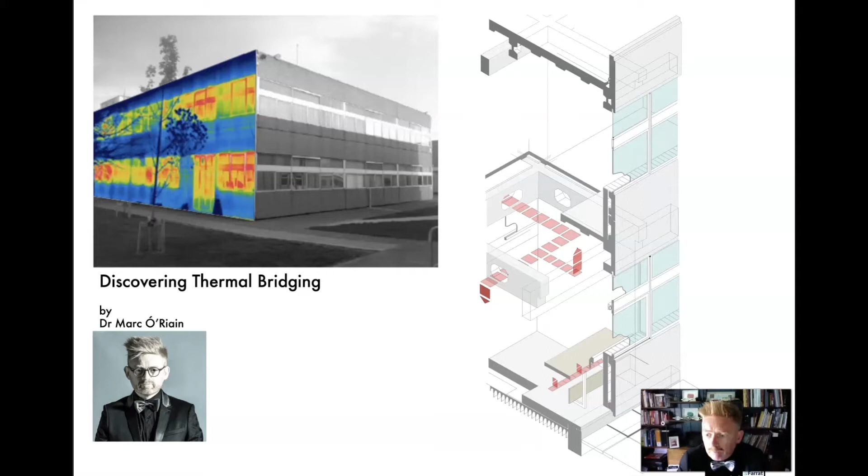Thermal bridging is first referenced in historical literature in a post-war engineering report from the Department of Housing in Denmark in 1956. In a study into moisture transfer in building envelopes, Escold and Korsgaard, who would later go on to design the first zero-energy building in Copenhagen in 1974, found that thermal bridging was happening on the inside of connections between concrete facades and inner floors. They had identified the risk of condensation, particularly with continuous concrete intermediate floor slabs. They also identified that modern, tighter concrete constructions were aggravating the risk of condensation at cold bridges.

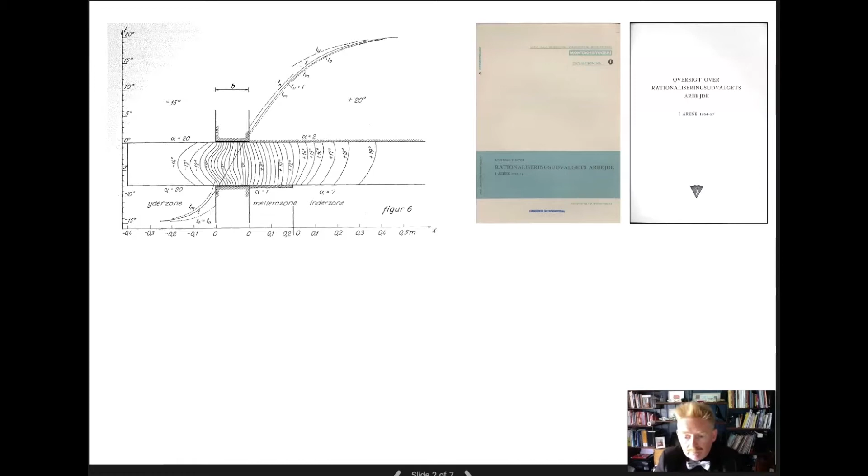The report indicates that there was a working knowledge of cold bridging as part of the Scandinavian construction industry prior to the 1950s. Yet, it was probably the language that became a barrier to the broader dissemination of this knowledge around Europe. Prior to the Second World War, human health was a concern of the modernists in particular. We know that Walter Gropius and Maxwell Fry had been arguing that clean modernist buildings improve the living conditions of the people in their Impington project in 1936 in the UK. Pierre Winter, an engineer and neighbour of Corbusier's in Paris, gave a lecture at CIAM 5 in 1937, arguing for a close collaboration between doctors and architects to reduce diseases to a strict minimum. So it was an issue at the time.

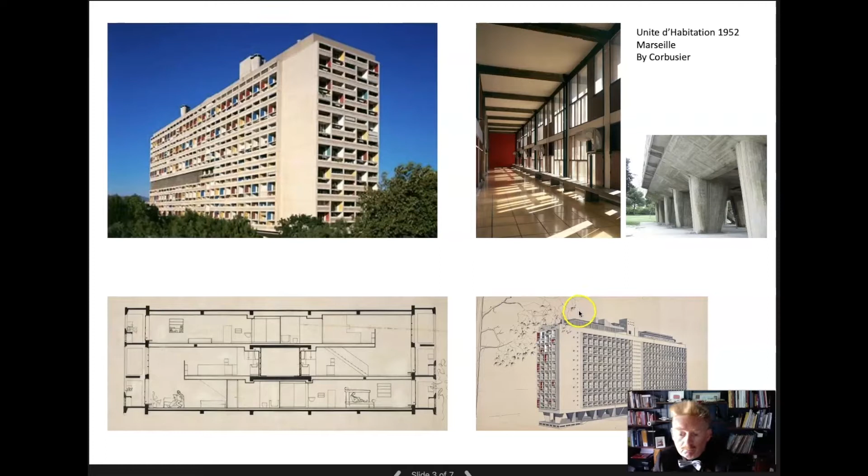We also know that Corbusier had understood the importance of aspect and sun path before designing and completing Unité d'Habitation in Marseille in 1952. Many of the young architects in London County Council in 1950 would be heavily influenced by Corbusier's béton brut of Unité d'Habitation. In 1953, the LCC architects completed Winchfield House, which was heavily influenced by Corbusier and Unité d'Habitation. In fact, it was James Stirling, who worked with LCC at the time, who attributed the concept of Winchfield House to Corb's much earlier and conceptual City in the Park. Such building designs would not benefit from the understanding of thermal bridging.

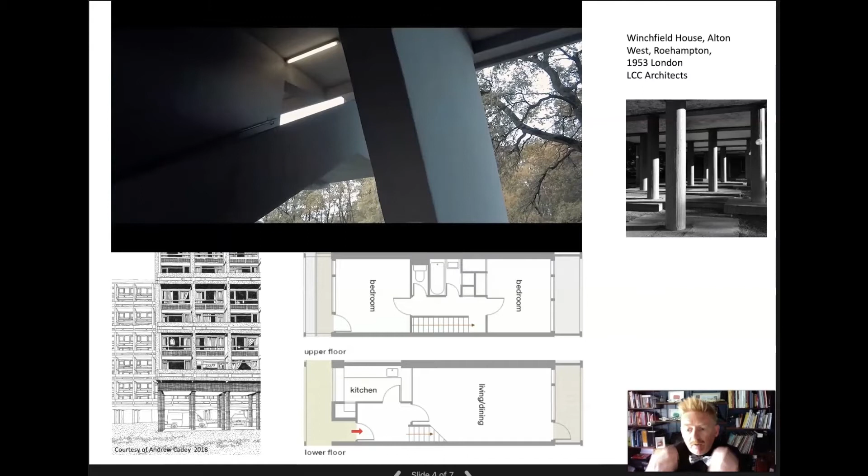In fact, it was Marmot in 1978 who argued that Corbusier carried through on a much higher quality in Unité d'Habitation than LCC did in Winchfield House, where they compromised on so many of the key features of Unité d'Habitation, which would have benefited the occupiers. Unlike Marseille, London would have a higher risk of condensation with much lower winter temperatures, little in the way of insulation in the buildings.

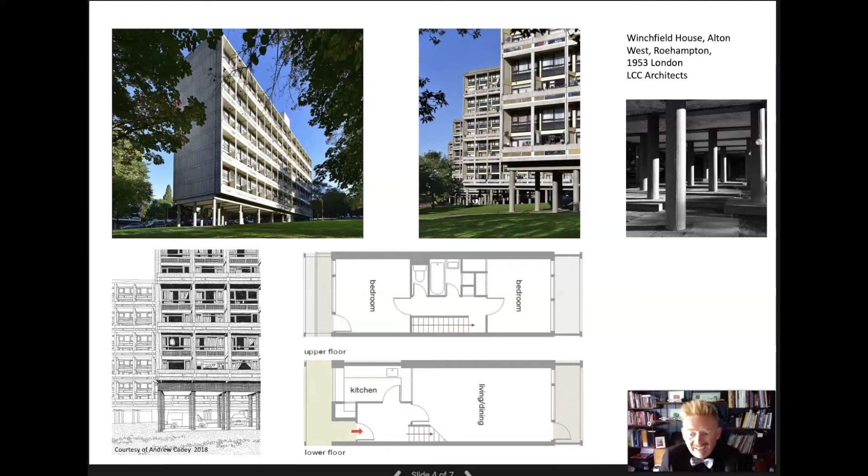So as we moved through the 1950s and 1960s, would British architects, who were continuing to provide mass housing, learn from these experiences and gain better understanding of the environmental consequences? As early as 1963, Brown and Wilson, writing in English in the Canadian Building Digest, warned that linear thermal bridges could cause condensation and structural damage, particularly in freeze-thaw conditions, which could be readily overcome with insulation placed over the entire exterior of the building. What a radical idea. They highlighted the impact of lateral heat movement in non-continuous constructions such as timber frame, which were popular in Canada and the US at the time.

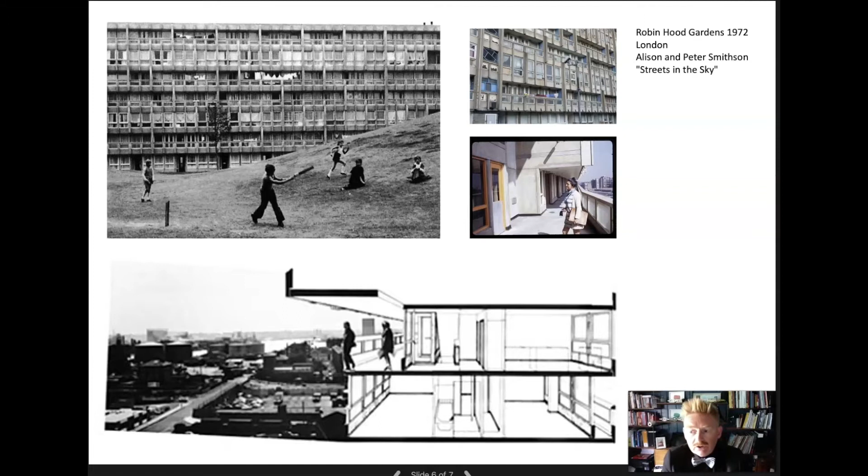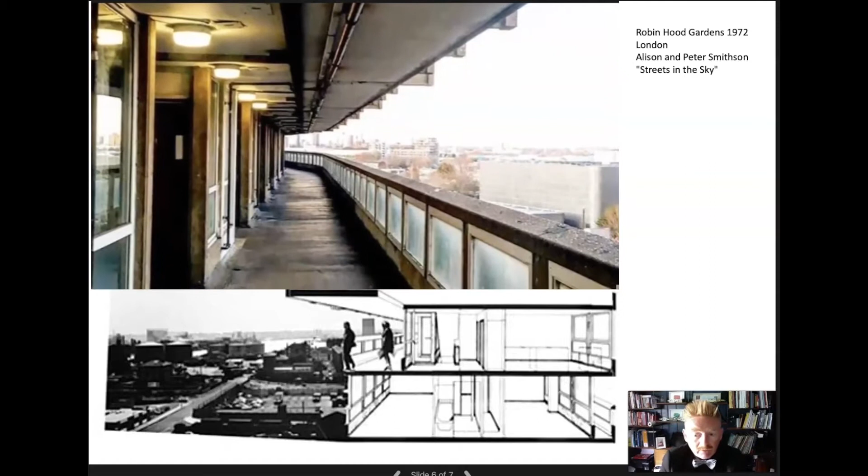So as the consequences of thermal bridging become more mainstream in the 1960s, would architects and developers of housing and apartments change the way they designed and built them? Despite the many social and environmental performance failures of the LCC apartment tower buildings through the 1950s and 1960s, still Alison and Peter Smithson would complete another homage to Corbusier nearly 20 years after Winchfield House, in 1972 at Robin Hood Gardens. The Smithsons, who we know were environmentally aware, and I would argue that perhaps there was an excuse in the 1950s for a lack of knowledge of linear thermal bridging, but was there an excuse in 1972?

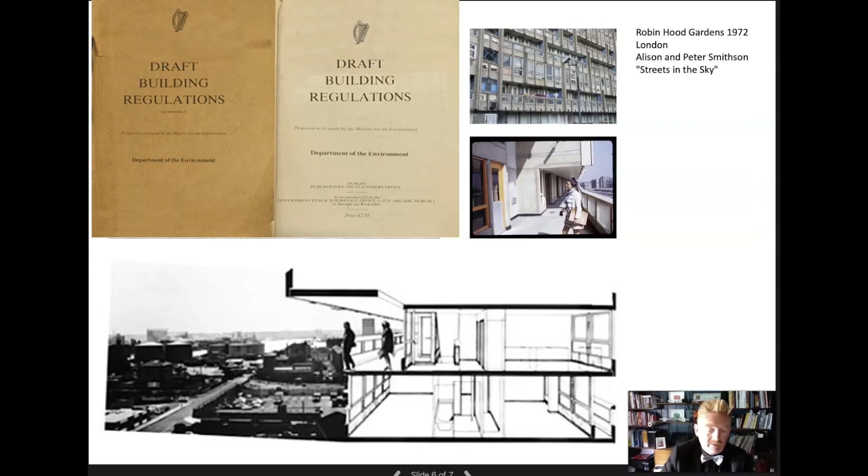Realistically, without insulation and with the use of single glazing, thermal bridging must have seemed of little concern in terms of energy loss. In fact, it would be the oil crises of 1973 and 1979 which would bring governments, policy standards, developers, architects, building owners and occupiers to a concern for building energy conservation, and it would only be then that issues like thermal bridging would start to get a fair hearing. Although they are all linked, Chernobyl, the Kyoto Protocol, it would be the Energy Performance of Buildings Directive in 2002 that drew our focus into building energy, and we became more concerned about insulation and thereafter thermal bridges in relation to heat loss.

So thank you very much for your time today, and I hope this gives you a little bit of historical context to the background of our topic today.

Thanks very much, Mark. As ever, you always provide fascinating historical context, just like with your columns in the magazine. And it is just kind of a sickening feeling to realize how much within our grasp some of this knowledge has been for so long. And it really just gives us even less excuse for our failure to act.

Anyway, I'm going to move on to our next speaker now, and I hope, by the way, all of the attendees are enjoying the Pecha Kucha format for these presentations. It's a difficult ask, I know, because when you're dealing with something as technical as thermal bridging, invariably you have to go into the realms of PowerPoint. So of course, this will not be as seamless as the kind of Pecha Kucha presentations you'd find on people showing what they've had for dinner. But there's more substance hopefully in this, more nutrition intellectually.

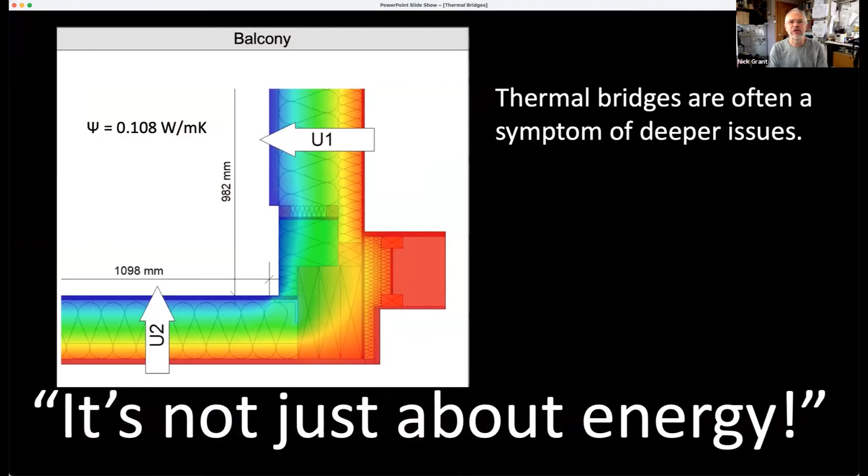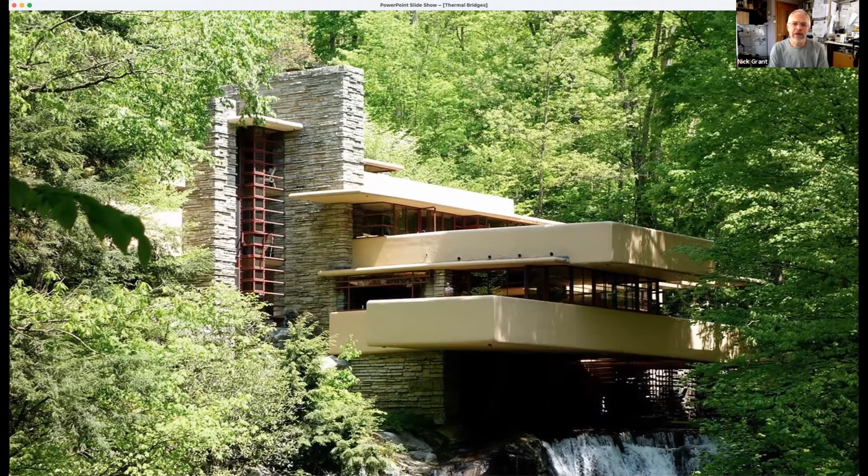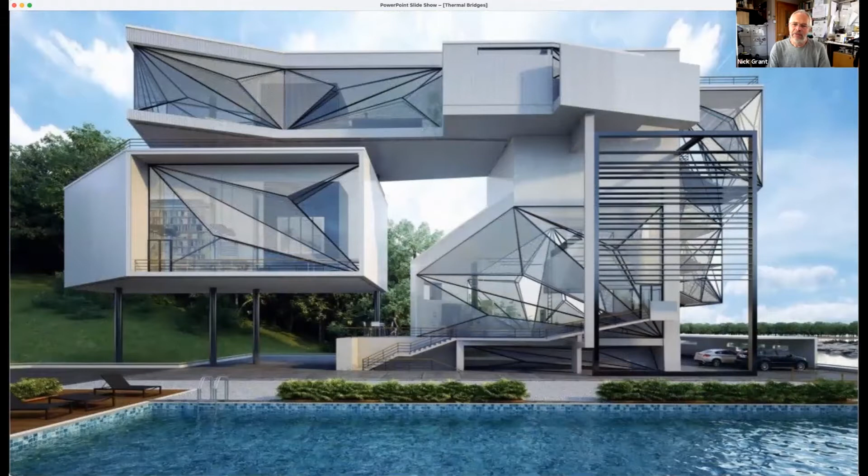And here, I mean, you can have some fun Googling cantilevered housing. Extreme architectural expression, clearly lots of challenges here. But is this what we really want to be doing? Are we looking for solutions to this problem?

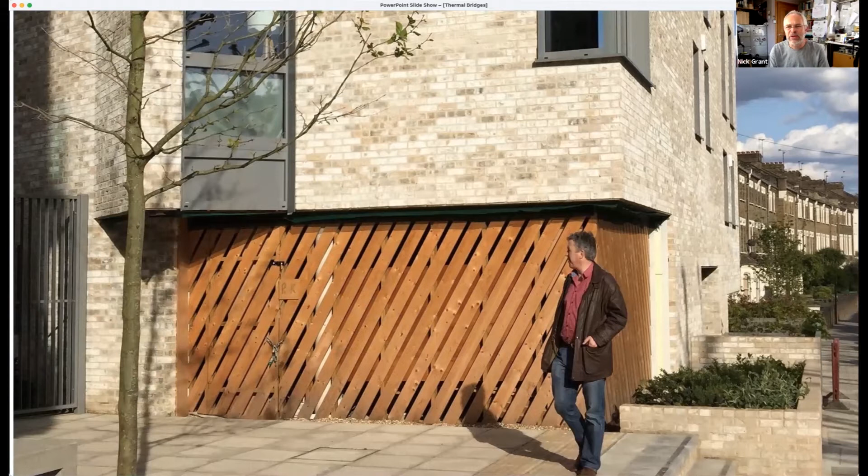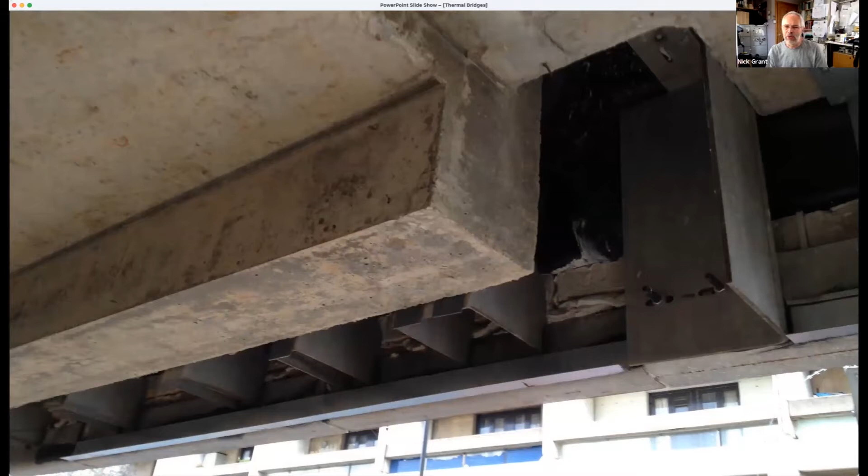So here we've the same Camden again. This is a passive house, Chester Balmore, less extreme than that example, but we've still got some fairly challenging structure. We've got the bricks starting at first floor in places, corner windows. So how do we hold this brickwork up? And the way we do that, of course, is with what you can't see here, the hidden steel bracketry. So steel angle sections, we see a few under the soffit here. And these have to be thermally broken because they connect the external brickwork to the inner warm structure.

And that's expensive, it's difficult. And how do you finish this off underneath? How do you finish the soffit? How do we insulate around these? So lots of technical challenges and things that are quite hard to make look good.

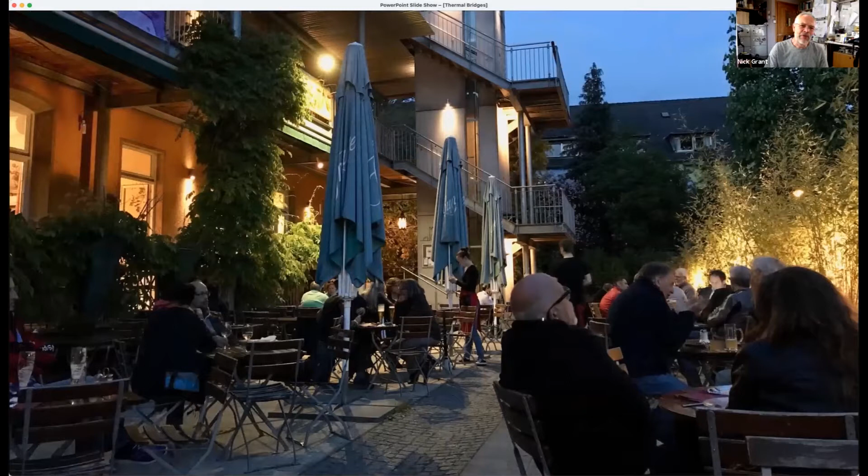In Freiburg, so here we've got, you can hardly see it in the background, just these nice balcony details. It's galvanized steel, it's all pretty industrial and pretty basic, but the overall effect is really lovely. We've got nice plantings, there's nice furniture, a really nice vibe in the cafe here. The overall effect's very good.

And also Freiburg, some housing. The very generous balcony spaces. We've got a lot of space here, supported on columns, quite nicely proportioned. Very simple balustrades without using toughened glass and so on. So thermally broken. This is part of the Passive House development in Freiburg.

Looks a bit different, but really quite a rational structure there, and less thermal bridging meant thinner insulation than Chester Balmore, so 200mm insulation in the cavities rather than 300. But this is a canopy at the entrance. Doesn't look much of a problem, but it's quite a cantilever.

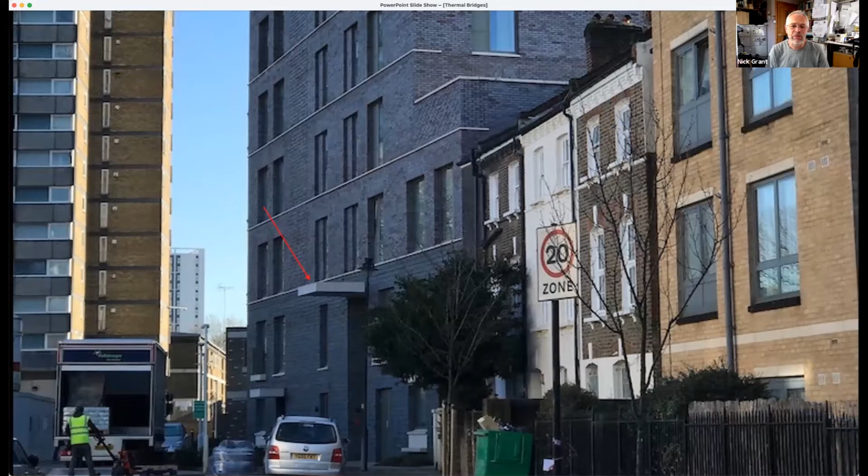That created quite a challenge for thermal bridges, airtightness, and so on. And it doesn't even give you any protection as you come in. So is that really the most clever design solution? It creates a lot of challenges, but could we have had an easier solution that was easier to build and function just as well? So this could be a development anywhere.

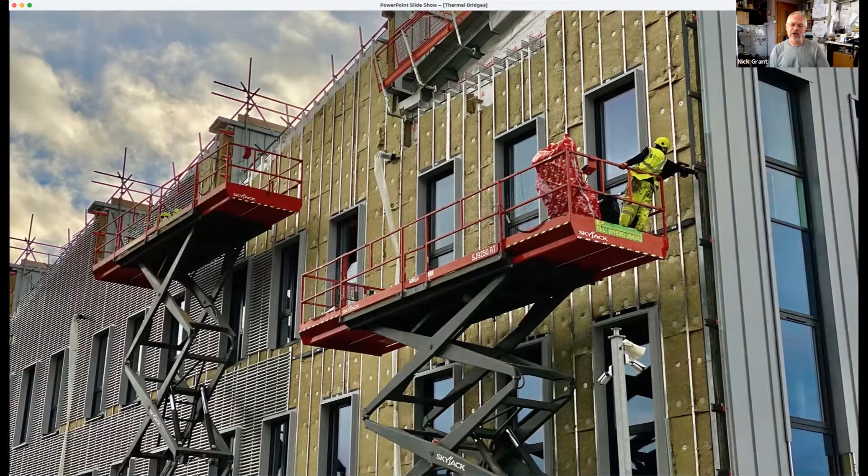This is some housing in Gloucester. Classic thing of lightweight cladding, external insulation, and then fixed back to either a masonry or steel structure. And here we can't avoid the thermal bridging. We need something to connect the two together, which goes through the insulation. And the usual solution is aluminium brackets, which hemorrhage heat.

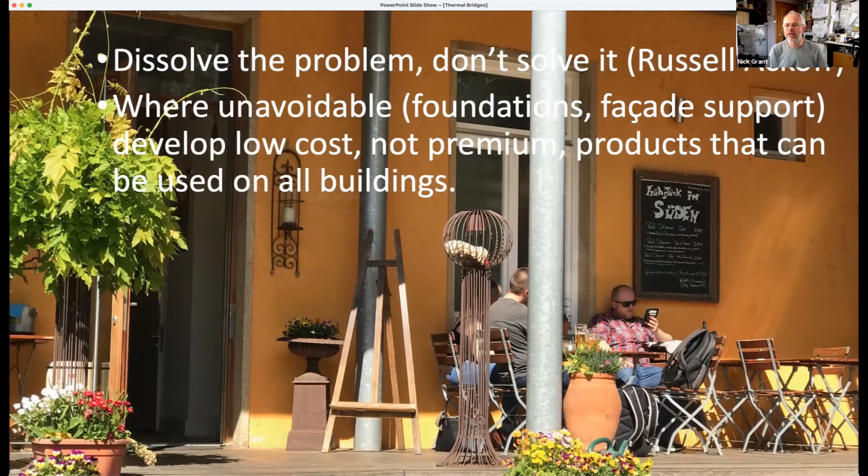So in summary, if possible, design out thermal bridges. Don't create structurally challenging situations like cantilever balconies and so on. Try and design these out because that'll create savings. It'll potentially even look more beautiful. And where it's unavoidable, where we've got to connect to the ground with foundations, or if we want to hang lightweight facades off the structure, then we do need some thermally broken connectors.

But what we need here is low-cost, simple connectors that everyone can use, not just for Passive House projects. We need everything you can get from the builder's merchant to be thermally broken, so we're not wasting energy and creating potential mold and moisture problems, as other speakers will talk about.

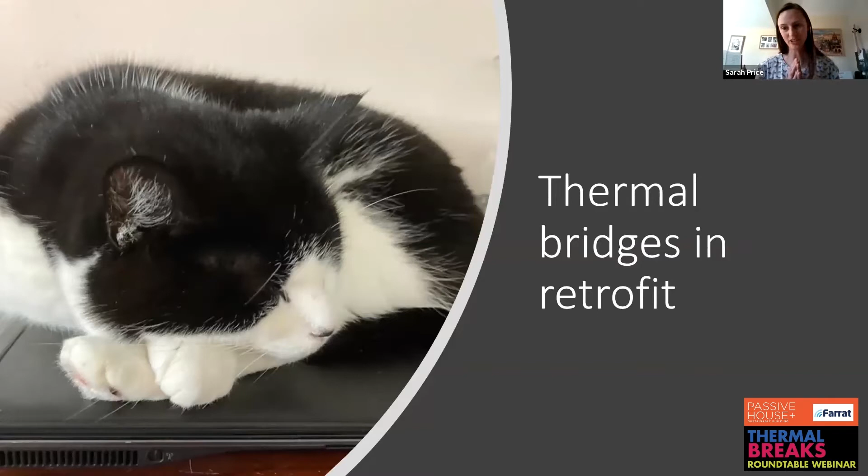So I'm going to mainly talk about thermal bridges and retrofit today, because they're trickier to deal with and they're more prevalent. And this is my cat, Scully, and I put her there because she loves warm places and she hates cold bridges. She's sitting on my husband's laptop there because it's the warmest place to be.

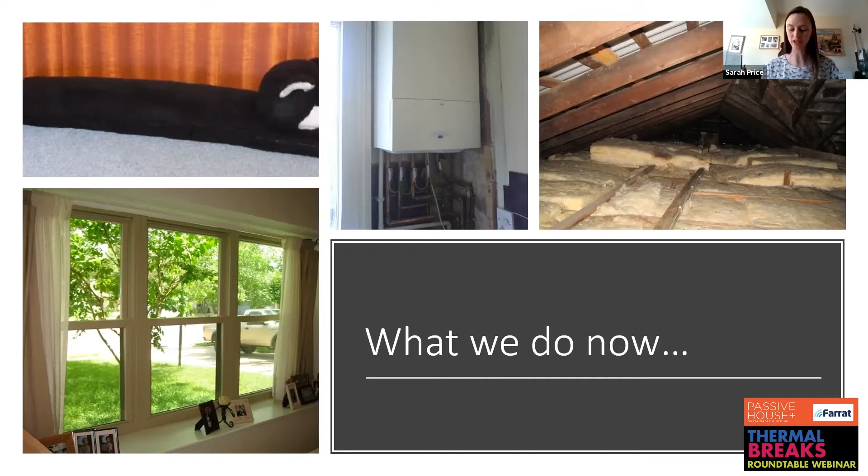Can we have a thermal bridge free retrofit, or is it an oxymoron? Well, if we say thermal bridge free is continuous insulation all the way around a building, then no, we can't, but we can mitigate against them. And there's two main issues with thermal bridges: mold growth and heat loss.

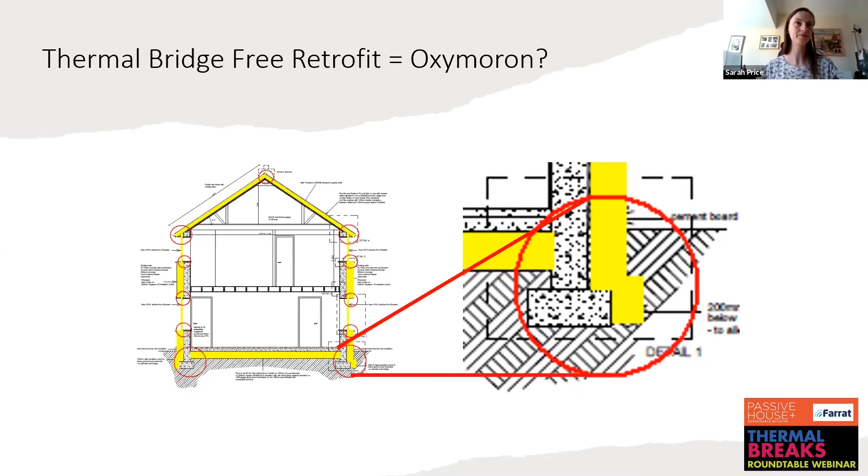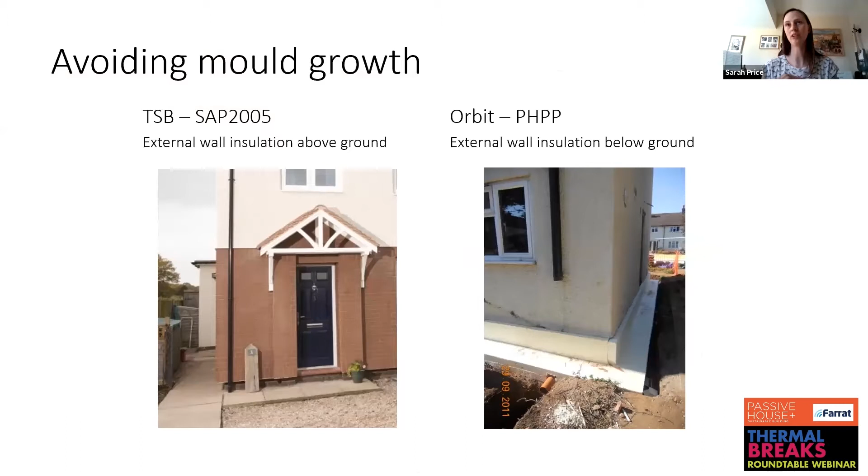So here's an example of external wall insulation. On the left-hand side, we've got the external wall insulation finishing just above the ground level. So both these properties have got solid floors in them. On the right-hand side, this is an Orbit one, and we've got external wall insulation extending down below ground level. So it's just the foundation that's in there.

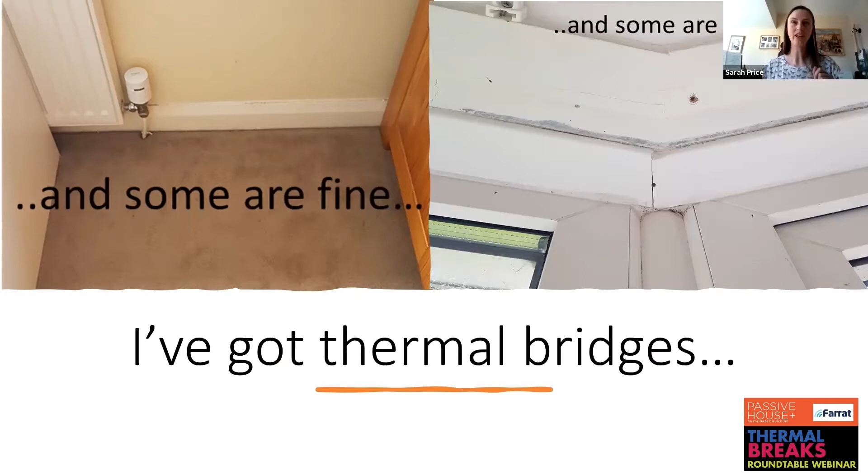But I've got thermal bridges. We've all got thermal bridges, and some are fine, like my wall to floor junction, and some are not fine. Some are mouldy, like in my bay window here. So I've got nice black mold growth that I have to clean off every year. So why is that? It's not as straightforward as if you've got a thermal bridge, you get mold growth.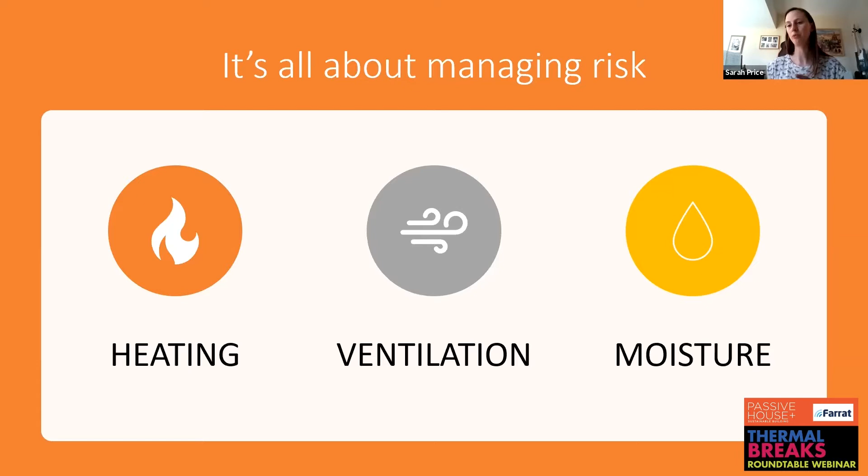We need to manage the risks. So we need to make sure that the space is heated well. We need to make sure that it's ventilated well and into the corners. That's the really difficult bit. We've got to try and control moisture. So through cooking, washing, bathing, we've got to make sure that we remove that excess moisture from the home.

There's another definition of thermal bridges, not just continuous insulation or incontinuous insulation, as the case might be, but it's actually a mathematical correction factor for a heat loss calculation. So we have U values that deal with the plane elements, and we have psi values that deal with the corners. And they come in all shapes and sizes, good, bad, and ugly.

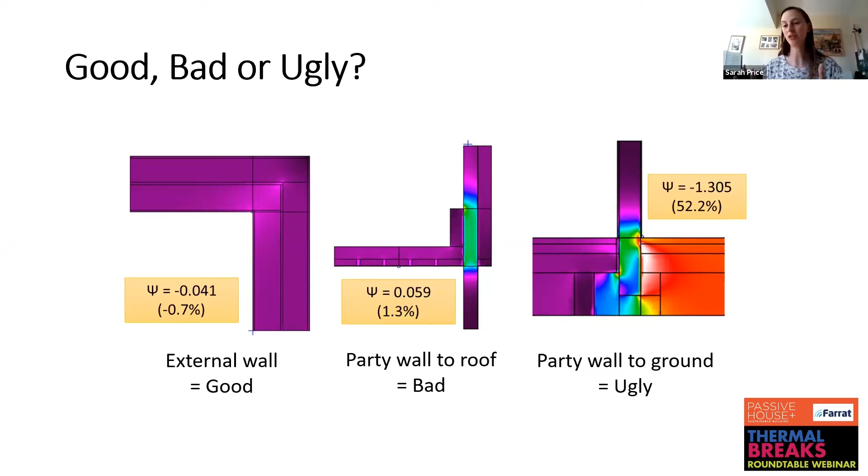So we can have good thermal bridges that actually make the heat loss better, because you basically said that that corner is not providing excess heat loss. We can have bad thermal bridges, most of them are, that mean that we do get more heat loss. And then we have ugly ones as well.

So how much heat can a thermal bridge lose? Well, we've got this situation where we're going to keep the windows in the concrete layer, big psi value, 0.5 watts per meter Kelvin. If we move the windows out into the insulation layer, we haven't installed it there yet, we get a really tiny psi value.

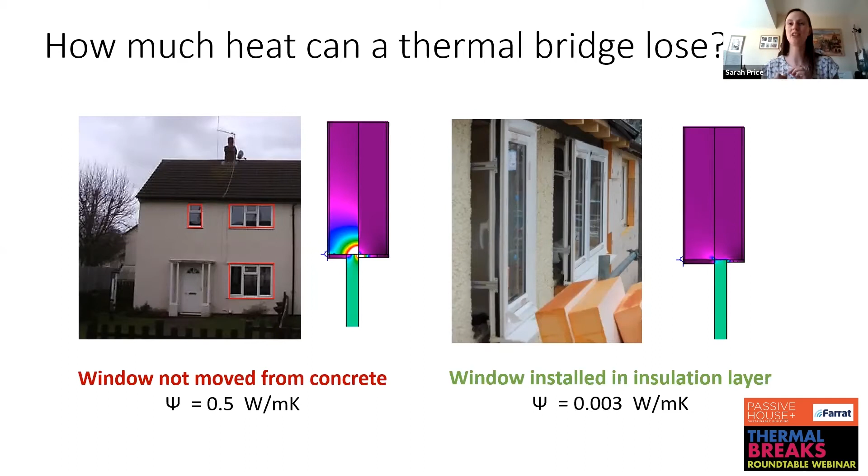But what does that actually mean? Well, if we leave the windows in the concrete, that's equivalent to 500 watts of heat loss, or having a Hoover on all the time in the winter. If you keep them in the insulation or move them to the insulation layer, it's the same as charging a smartphone. So 5 watts, much smaller heat loss.

Cladding fixings, Nick talked about cladding fixings. So I have a bee in my bonnet about cladding fixings. So this is an aluminium fixing. It increases the heat loss in the insulation by 92%. And these calculations were done by Green Gauge. They're 3D thermal bridge calculations. And they worked out how many of these cladding fixings we needed.

If we take a bit of foam glass, so that's a structural insulating block, 50 mil of it, and put that between the wall and the fixing, we still increase heat loss by 42%. So huge amount of heat loss.

What we really need to do is we need to have a look at the material that it's made out of. So this cladding fixing is made of pultruded GRP, or fiberglass, as you might know it, and it increases the heat loss by only 8%. So it's exactly the same size and shape, but it's made of a different material. So it's all about the materials here.

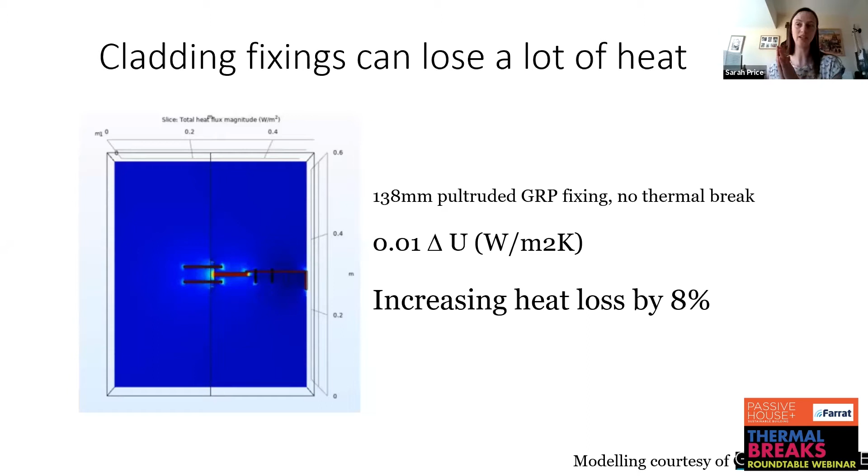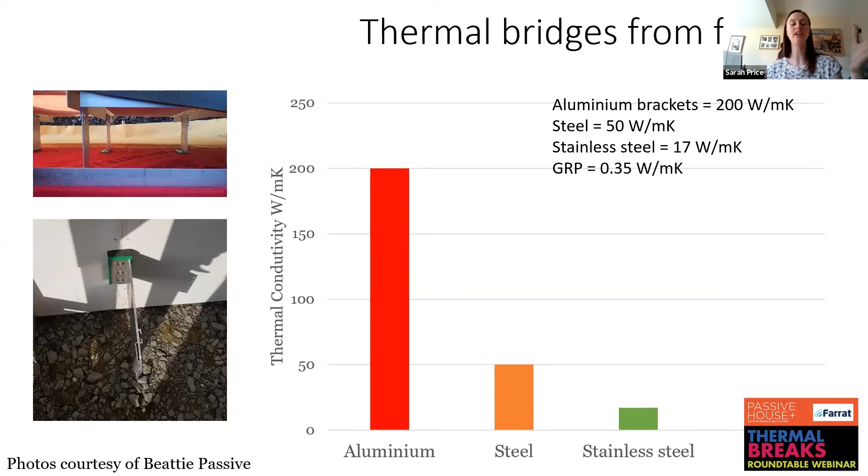If we take something like aluminium, it's got a massive thermal conductivity, which means it loves transferring heat. So 200 watts per meter Kelvin. Steel, bit better, 50, stainless steel at 17, but GRP 0.35. And our insulating materials are about 0.03. You can see on the left here, it looks like aluminium actually, but it's a lot better performing.

Let's have a look at balcony connectors, another thing Nick mentioned. So here we've got some steel to steel thermally broken balcony connectors. Okay, so these are designed to break the connection between steel to steel. But what we find is that actually they're still quite big thermal bridges.

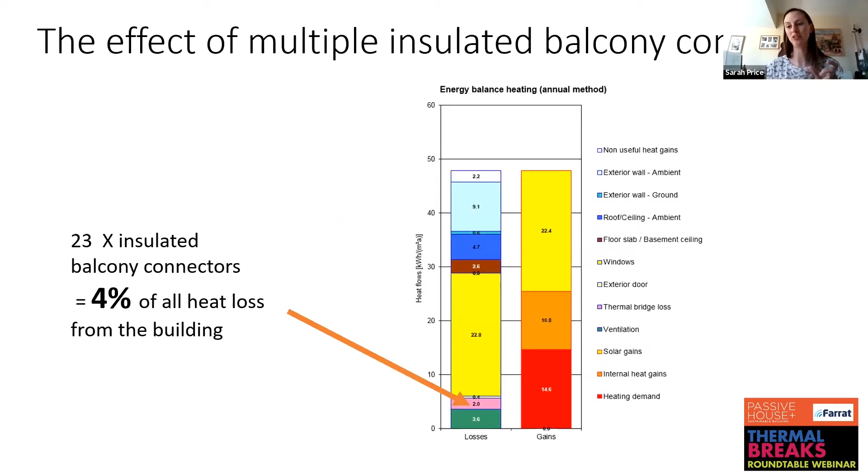If you've got a decent amount of insulation in there, you put one of those in, it's still a thermal bridge. And this project has got 23 balcony connectors in it, and that makes 4% of all the heat loss from the building. So it's still quite significant. They add up very, very quickly if you look at the heat losses.

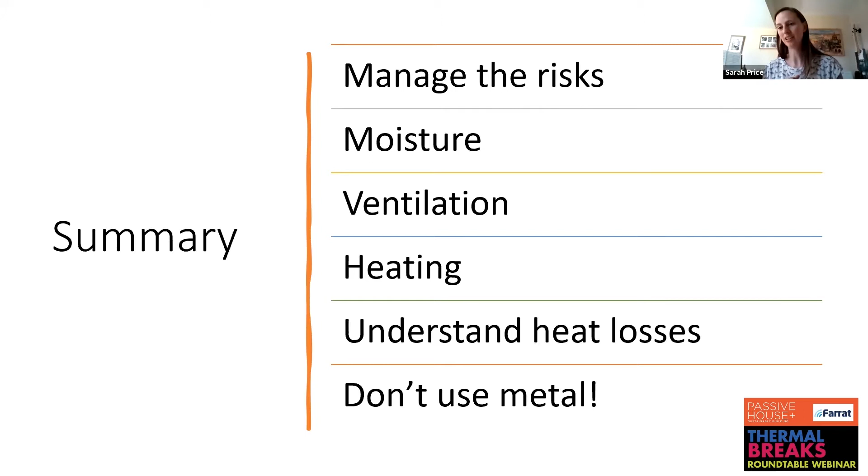So in summary, manage the risks of your thermal bridges, remove the moisture, get your ventilation right, make sure your buildings are heated well, understand the heat losses. So how much is it actually going to cost you? Are you going for certification? Does it really matter? And lastly, don't use metal. Think about the materials that you're going to be using.

And that's me done. Thanks very much, Sarah. That was very interesting. And you found a way to put some quite technical subject matter across in terms that at least I could understand, so I think everyone else's chances must be good. What we're going to do now is open it up for a panel discussion; we're in the region of about 20 minutes or so.

The top one, which I guess we'll deal with, is what is the best way to thermally break a window that is fixed back to SFS? I presume that's a steel frame structure, and sealed around the frame to metal angles at the sill and head. Don't do it. Try and avoid using steel angles for a start.

But if you have to use steel angles, you could put something like Compacfoam, which is a structural insulating material, between the steel angle and the window frame. In a retrofit situation, we use a timber bearer underneath, simple solution, steel straps going back at points, which are very small thermal bridges, and so therefore you're reducing the heat loss. Very good.

I should say as well, thank you for that, but I preempted myself a little bit. I'm going to actually introduce some of the panel speakers. John Morehead. John is the managing director of Wain Morehead Architects. He's a long-standing interest and involvement in low energy building. John became a certified passive house designer in 2010 and has produced a number of landmark architectural passive house projects ever since.

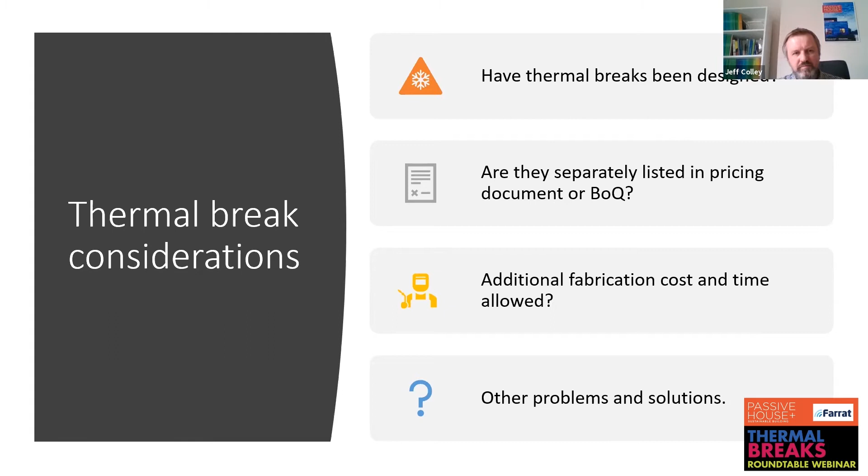My job is mainly to improve the project's design as early as possible before we move ahead with the construction. And today I want to talk about thermal breaks and a few considerations, like, have thermal breaks been designed on the project? Have they been included in the costing documentation? Are they causing us additional costs, and not only costs for fabrication, but also lost time? And do we have other problems or solutions? So we're going to talk about a few examples.

This is one of our recent new build passive house projects, which has been completed, which has a very complicated and very extensive steel frame. The focus here will be on a thermal break between the brise-soleil and steel structure. So no wall has been parallel in that building, which created a mass amount of problems with the steel structure. And we had to build the entire project in 3D, photo on the left. So it's a Revit coordination between our steel supplier, Stilo, which produces IFC files, and also Contrasol, which is a supplier of the brise-soleils. What we're basically trying to show is that the thermal break issue we had was extremely complicated to coordinate between various parties.

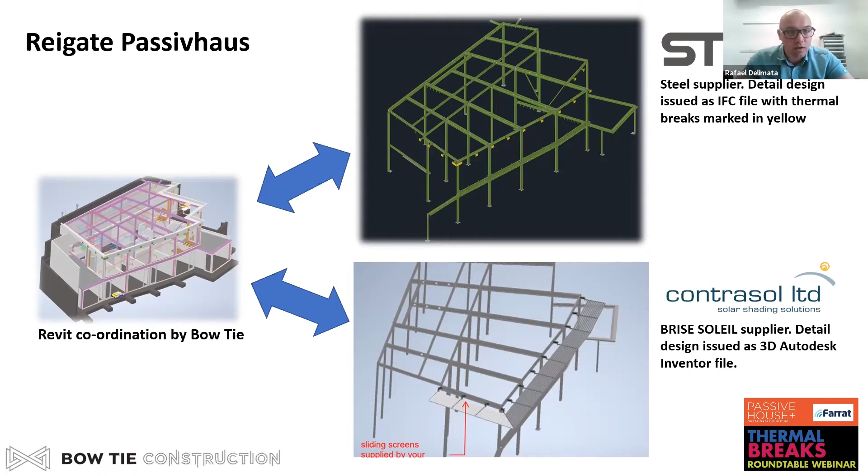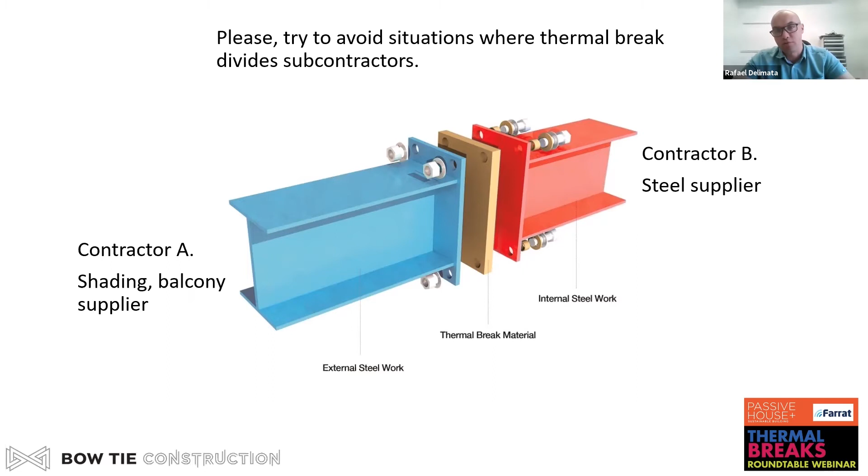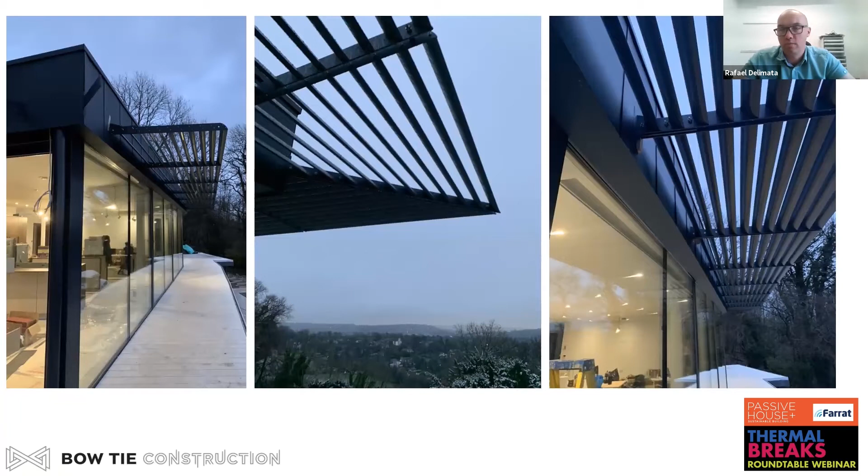We used Farrat thermal breaks here. It's a simple sandwich, and air tightness was used between steel plates and plywood structure with airtight silicone around all the bolts. So that was ready for the specialist contractor Contrasol to come in and fit the brackets. You can see the arms sticking out on the left-hand side, and then further fins being added on. This was followed by installation of the zinc cladding all the way around the building. And it was very successful. We completed the coordination, including very random angles on this brise-soleil system.

And I think a few things now to summarize from this project. We're working on an essentially thermal bridge-free passive house, but those elements had not been designed out. And even though we had separate pricing in a document, it wasn't enough. And did we allow additional costs and time for all this work? The answer was no, we didn't. And a further complication was that we had to position thermal breaks in consideration of air tightness, and also the size of thermal breaks changed due to the shading wind loads.

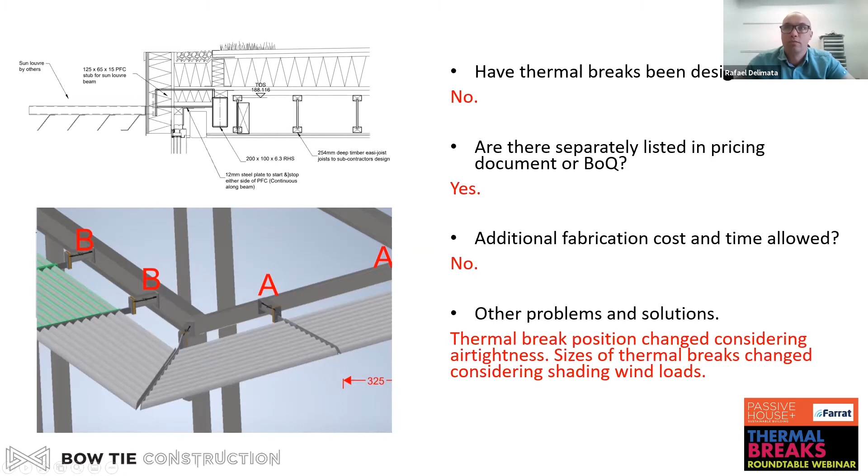So the next project is a Putney EnerPHit project, quite a simple build. Again, externally insulated from outside, 200 mil of insulation wrapping the whole building, so there weren't too many thermal breaks. But we had 3D modelled all the steel connections as per structural engineer specifications and our site survey. We then asked the steel supplier to add our standard thermal break sandwich. So this is something we're just using now as a standard.

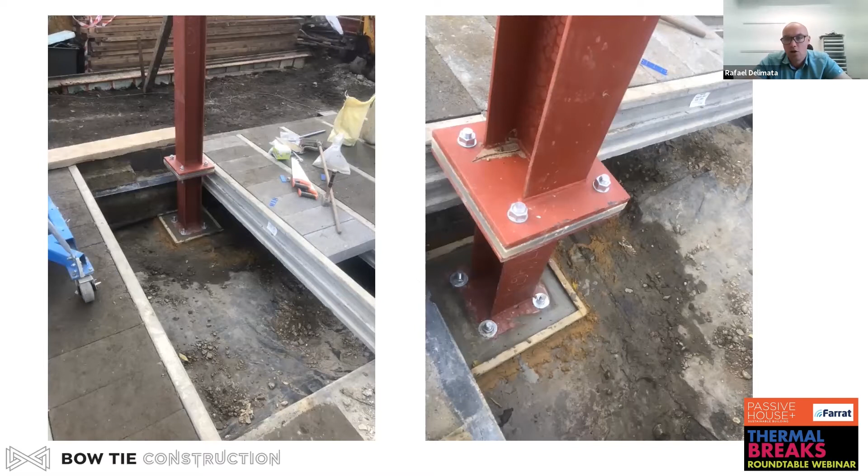It's 2 pieces of 300 by 300 by 10 mil plates with 4 number of M16 bolts and 25 mil Farrat TBK thermal break in between. And that's when we haven't got the design ready by engineer or architect, we simply put that in and we know it will work. We then follow this with the structural engineer and double check everything.

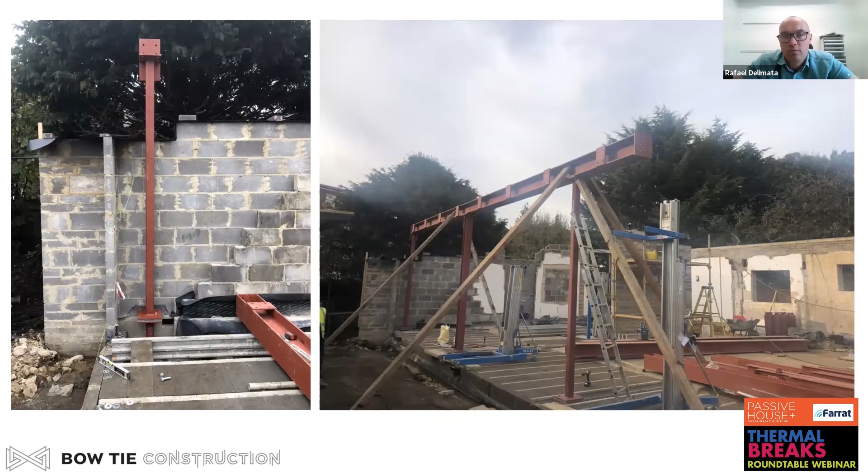And then the thermal break will only be used on this project for the columns. So all the other walls will be externally cladded, so we don't need any thermal breaks. And the project was delayed by 1 week because of the delay on coordination of those plates. So have we had the thermal breaks designed? No, and they were separately priced, which was good. And I think this was correctly costed, but no extra time was allowed for the fact that the thermal breaks have to be done to measure.

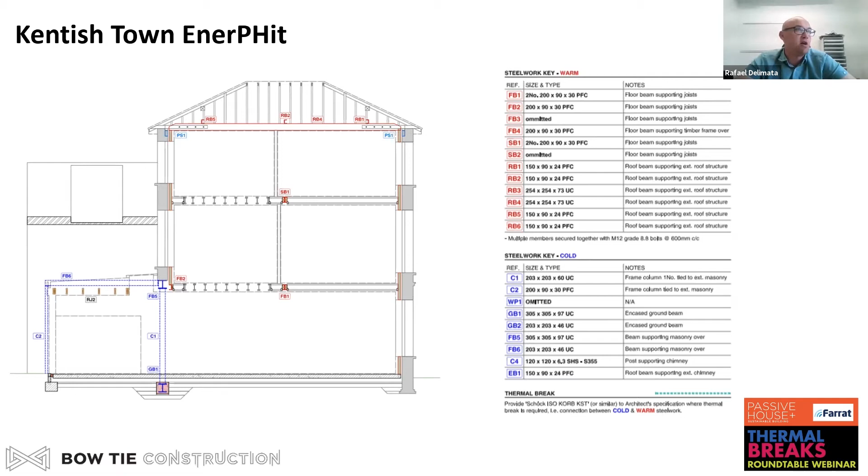And then our next is a Kentish Town EnerPHit project, which required complete internal demolition. So very deep retrofit. New internal timber structure was built and it was connected with the old shell of the building. On that project, we worked with Bob Johnson, the structural engineer, who was fully aware of thermal bridging, which was very great news for us. We really like his approach and hope for more engineers to adopt this simple technique where the cold steel is marked blue, the warm steel is marked red.

So when the question is, do we have the thermal breaks designed? Yes, and this was one of the very few projects that was properly done. Did we have that costed in? Yes, and it was properly costed. There was no additional cost later on, no delays, all went very smooth. And the color coding also helped laborers on site understanding which parts of the steel structure have to be additionally insulated.

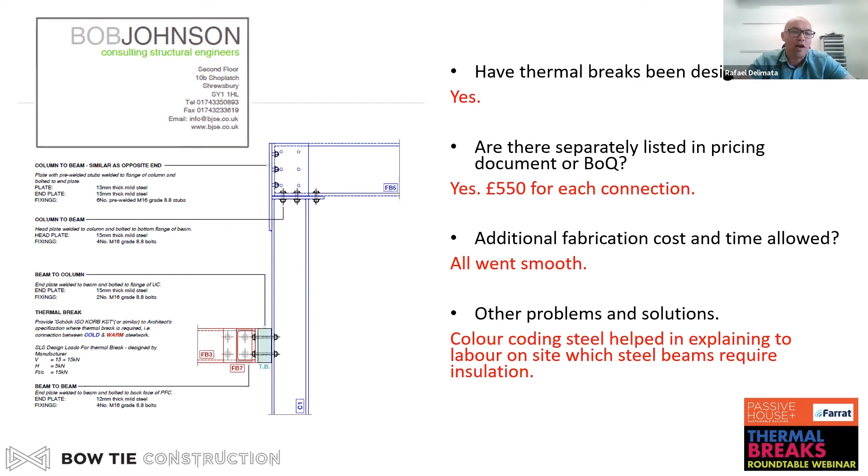So that was me. Thank you very much. And thank you for the opportunity to speak today. And I apologize if this was an extremely practical approach, concentrating purely on steel connections. But I thought if I give you some realistic examples and dive into one detail, we're not going to be talking only about very vague ideas of the thermal break.

I think it's very useful, Rafael. I mean, even that takeaway of the color coding, it's analogous to the way that it's become quite common to have the airtight layer drawn in red on the plans, so that there's just more visual recognition of what it is. So I think that's a great takeaway.

So next up, this is Professor Will Swan, the Director of Energy House Laboratories at the University of Salford, where he leads the Buildings and Energy Research and Innovation team. He's currently leading the development of the £16 million Energy House 2.0 project, a major building performance research facility. He's also chair of the Greater Manchester Combined Authority Low Carbon Buildings Challenge Group and a member of the mayoral Retrofit Task Force.

And Joe Pemberton, who's presenting with him, studied mechanical engineering, finding aptitudes in heat transfer and fluid mechanics before taking up an Industrial Cooperative Award in Science and Technology PhD to further his studies into heat transfer, applying the physics to real industrial applications. Jointly working with Farrat and Energy House Laboratories at the University of Salford, the work focuses on the design of an experiment to quantify thermal bridging and structural breaks with modelling and in situ measurements.

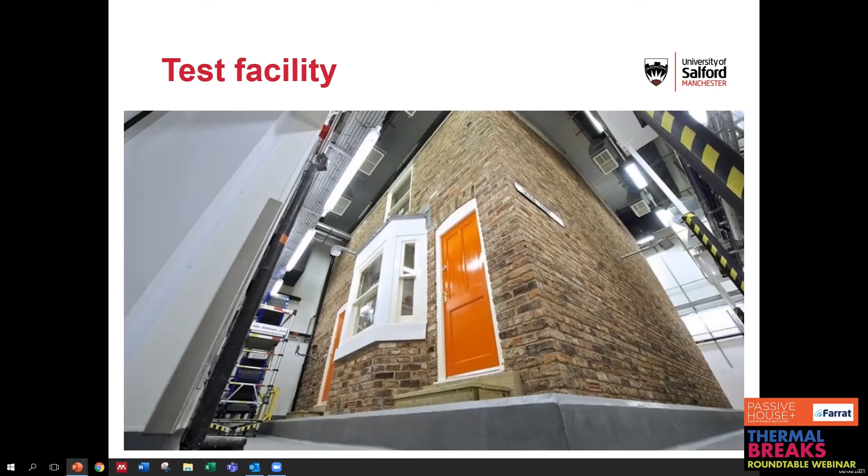dynamically, or it can hold these temperatures to quasi-steady state, which provides a unique opportunity really to validate theory and novel measurements, which is exactly what I did in a preliminary experiment analyzing a simple corner bridge. And I used 2 novel measurement methods, one with IRT and one with heat flux plates.

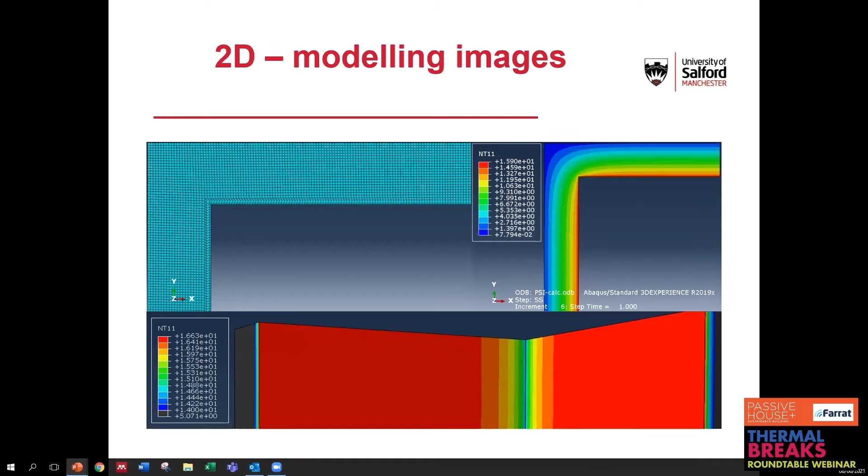I took measurements from this investigative detail to calibrate a thermal model to try and validate the model calibration technique for the experimental design. Surface resistances were set at standardized values, and the learning from this is that the actual surface resistance values you set are quite sensitive. So the standardized versions of the surface resistance were taken forward to the next experiment and measured.

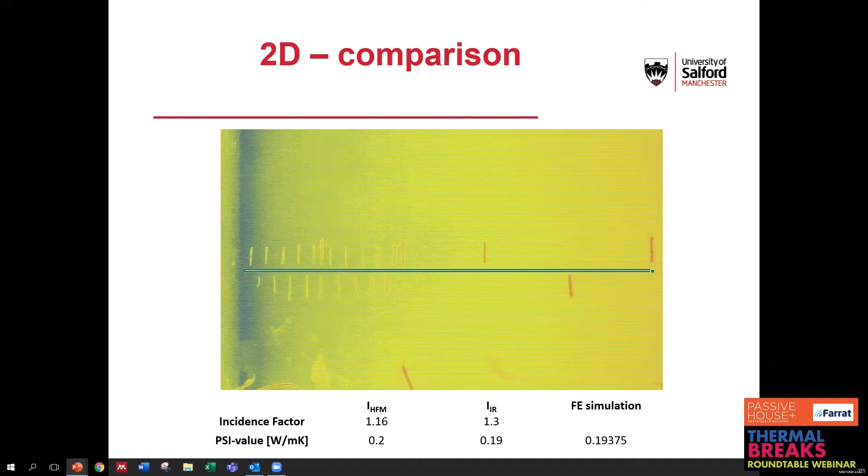Now, this is how we calculated the incidence factor, and I did it with the heat flux meter and the infrared. I converted them to psi values and compared them to the finite element simulation, and I found a really good agreement. So this was then carried on into the next experiment where we could really look into the 3D heat flows. So this 3D experiment was a preliminary one.

It's a little bit like a Juliet balcony, as we've seen before, but we had to modify the Energy House to produce this balcony, to produce this thermal bridge, because there were no 3D bridges of this sort where we could test thermal breaks. So we realized this by putting a steel cantilever beam on. We had to make a soft sand cement mix to try and make perfect thermal contact because the brick surface was quite rough.

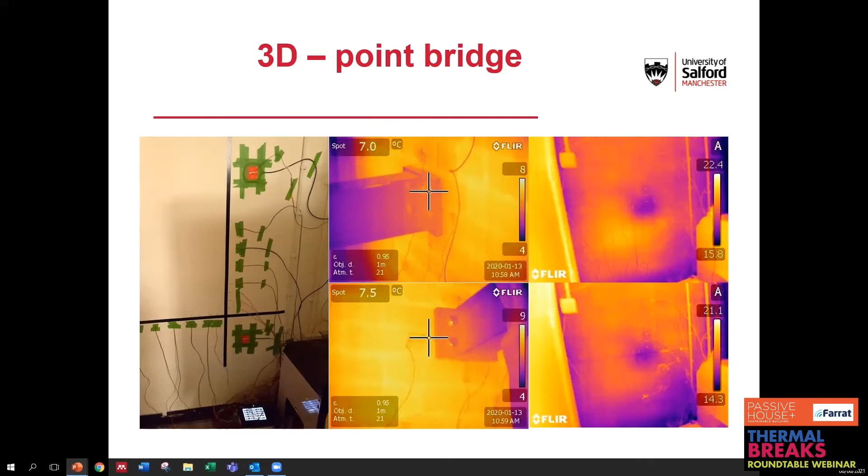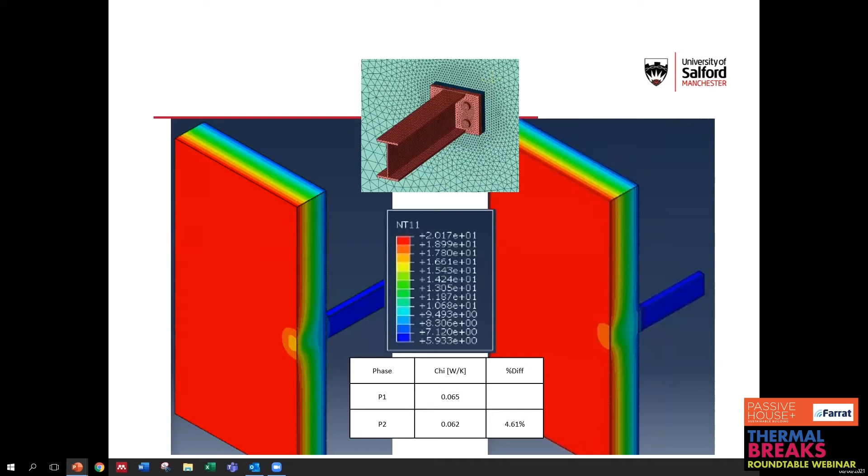And what I did is I retrofitted external wall insulation around the thermal bridge to try and exacerbate the thermal bridge effect. Now, I didn't know what thickness this external wall insulation would be because it's comprised of soft wool. So I didn't know what thickness it was going to be when it was retrofitted to the wall.

So I used a heat flow meter to compress it at different thicknesses and found an effective conductivity at each thickness. So when it was retrofitted, I could just interpolate the actual effective conductivity and then input that into the model, which is what I did here. And you can see the comparison.

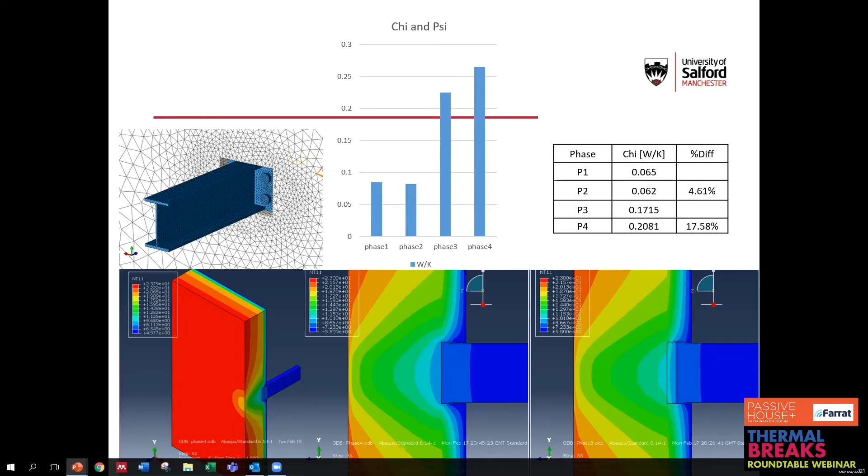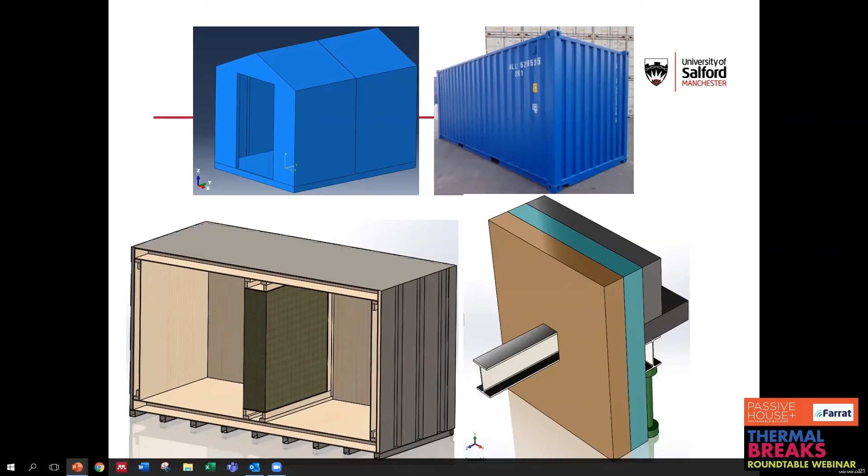So this sort of wasn't exactly what we wanted to do. In lieu of trying to find a real balcony to test, which was the true goal, COVID hit. So we decided to try and make our own sort of hot box. There's a cheap solution and an expensive solution. The cheap being 2 sheds put together, and the expensive version being a container which would be insulated to the nines. And then I'd be able to put up my specimen between the hot and cold side and test it.

Now, the budget was cut short, and the Energy House came to the rescue again, and they let me remove a window from the upstairs conditioning void, which is the neighbour to the actual Energy House itself, so I could put my specimen in the wall. Now at the bottom you can see the preliminary models that I did, just to make sure that the flanking losses around the edges weren't affecting the 3-dimensional heat flow through the actual thermal break, which we want to monitor.

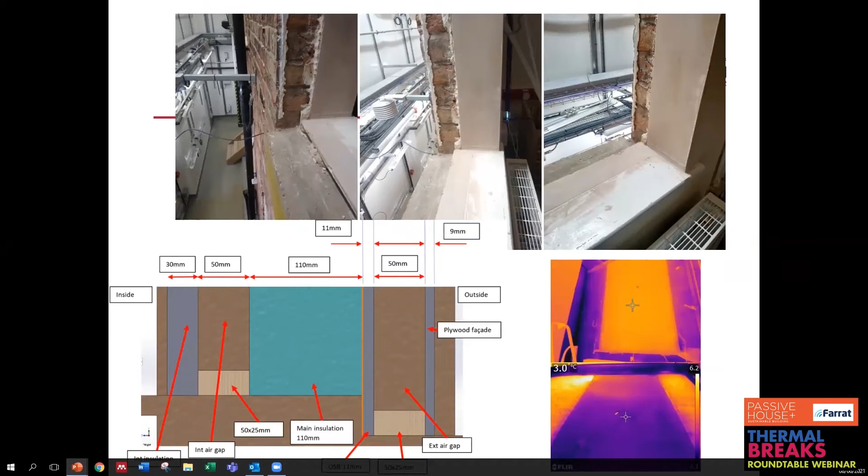So the bottom left shows you the schematic of the wall I chose, which we were aiming for a U value of about 0.18. In the middle there, you've got about 110 mil of insulation. You've got a plywood facade with 2 air gaps. And you can see the infrared imaging, external and internal, looking at the walls.

Now, we cut a hole in this wall after a baseline test to put the steel through. The steel was then put in. We bolted the steel up, so it was easy enough for me to change the thermal break variants from the external side. And we're going to test 6 variants, 3 materials and 2 thicknesses of each, 5 mil and 25 mil, and they're all Farrat breaks.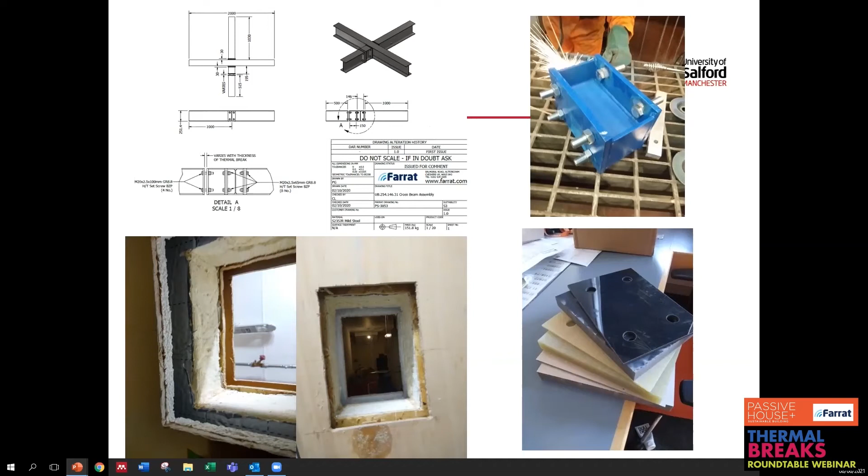So this is what it looks like at the minute, and this is where we're gathering data from. The steel beam's being propped up on Acrow props, which are anchored to the wall and the floor, because I didn't realize how heavy this beam would be. So yeah, that took me by surprise a little bit. But this enables us to really look at what the breaks are doing.

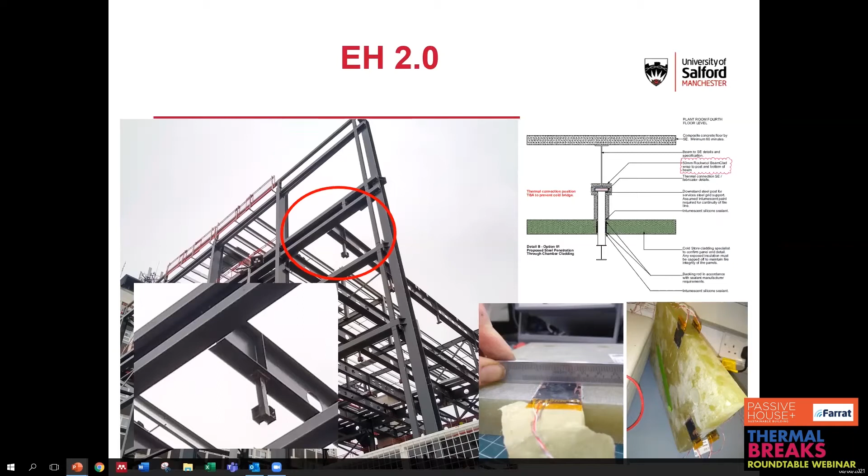Aside from this, we are looking at using a real case study, but unfortunately we won't be able to get any heat through the actual embedded breaks that are put into this Energy House 2 construction until February next year. So this is future work, but it allows us to actually monitor a real live case study of where these structural thermal breaks go by embedding sensors and tuning the models. Again, just trying to reduce the performance gaps between the as-built and the predicted energy performance. So I'll let Will finish up with where we're going in the future.

So I think this is quite interesting for us, really, because I suppose we see it very much at regional policy.

So what's going on in terms of what is going to be demanded by local authorities, city regions, with them all heading towards 2038, 2030, 2040 for zero carbon. And I think we're seeing less quick wins. So we're having to look at the detail a lot more. It's not just running around filling in cavities and putting loft insulation in.

So we really need to start thinking a bit more heavily about the design from top to bottom, which Passive House helps us do. I think we're going to see a lot more measurement as sensors come down, as comms come down in terms of cost. People will want to see what things are actually doing, and really what things are actually doing is more important than how we've modeled them.

And I think on the other side of things, the thing we're very interested in is getting the skills and knowledge out there. I think people alluded to that, the learning that we accumulate around these issues. I think that for me, if we're going to do anything at scale, is probably one of the most important things. Okay, I think that's us.

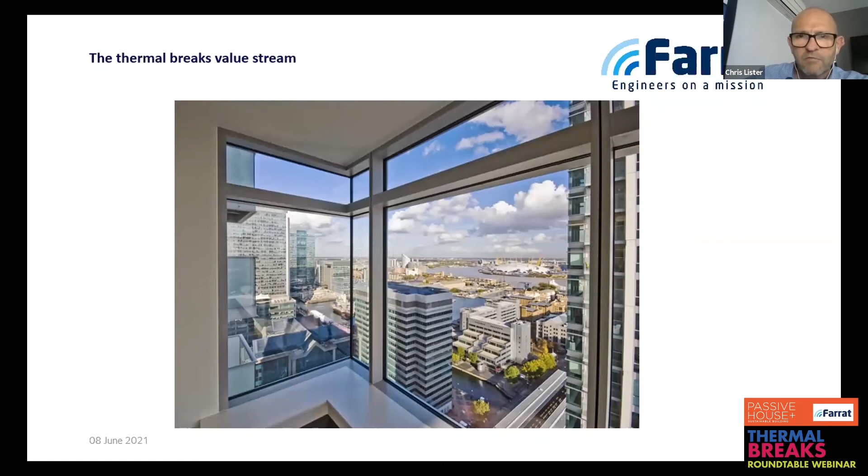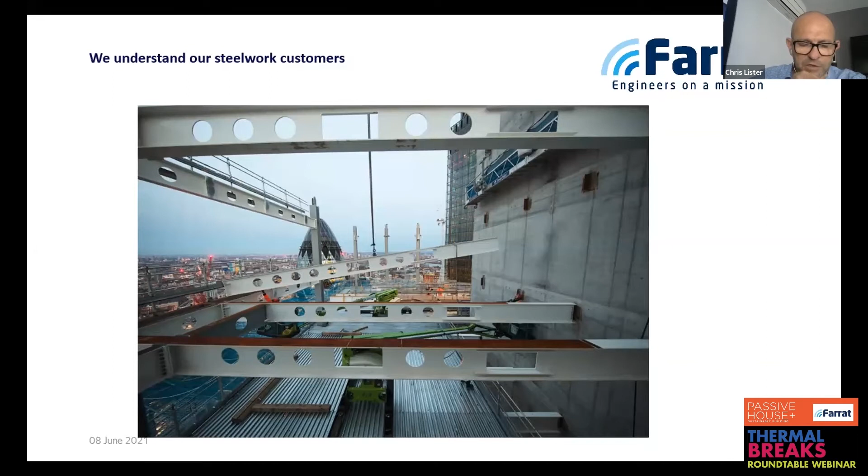Thermal breaks, which is the value stream I look after, we are very primarily concerned with construction of new build. We see retrofit, but a lot of the work we do, as seen in the details, is with steel frame. We see a lot of concrete work going on, but a lot of what we do is structural. The primary people we deal with are our steelwork customers. So we spend a lot of time understanding what their world is, how they work, what they need from us, and making sure that we are answering all the questions that they put to us.

We understand our specifying customers. They're a mixed bunch, and depending on who you come up against, they have some great ideas. We're quite happy to work with everyone and figure those out. We also understand that some things are unworkable, and really we should be able to, hand on heart, tell people that. We understand thermal performance. This is one of the cornerstones of what we do in Farrat. Like the work we've just seen from Joe and Will, we want to understand to the deepest level what we do for thermal performance, because that is core to what we do.

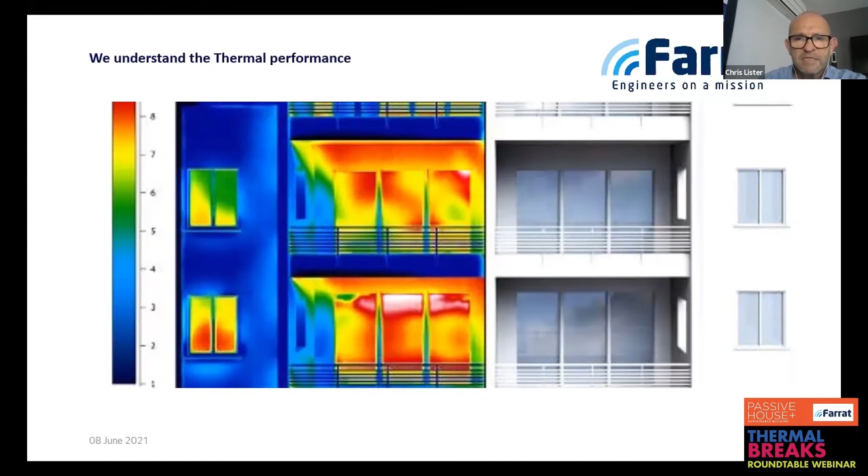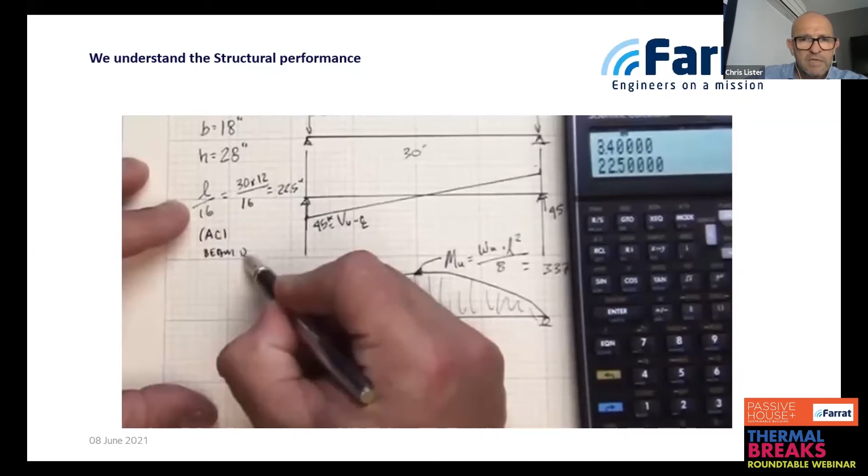We also understand structural performance. We are engineers at heart, and we are trying to make sure that everything that we do stands up. So we have this ability to think both from a thermal point of view of the construction, the building envelope with the architects, and also with the structural engineers. And we understand it's a balancing act. We know that if something has got to stand up and it's made of steel, it's probably not very good at being an insulation. And equally, if you've got something fantastic at insulating, it's probably not going to have structural performance. And that is where we sit.

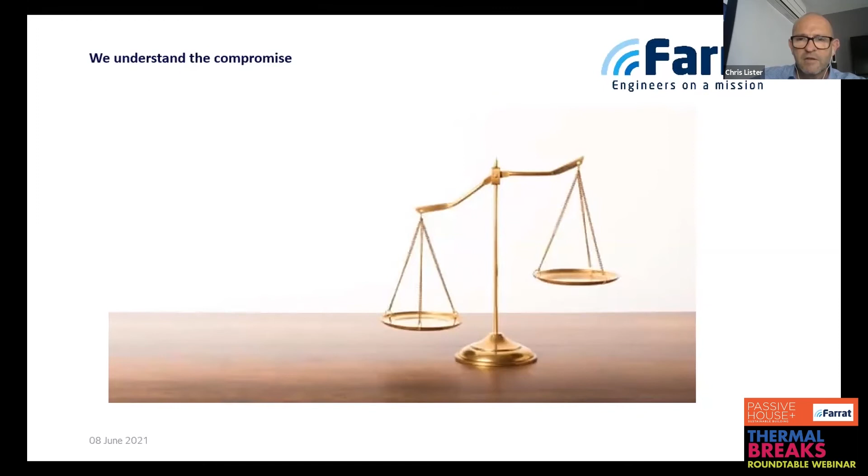And that way we understand the compromise. We know that sometimes you can't do everything that you want, but we also understand that it doesn't have to be a total compromise in terms of the aesthetic form of the building. And we understand that there are ways of making sure that those compromises don't define your building.

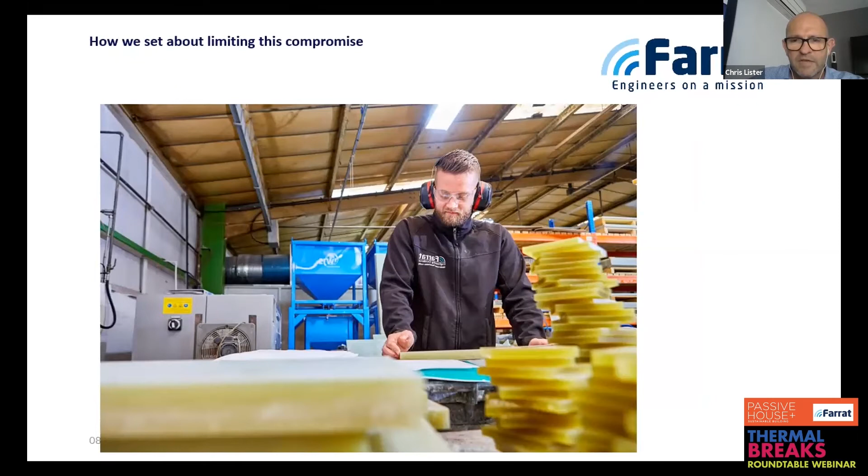So we spend a lot of time working solutions. We make products. We understand the role that we have in making something that is both affordable and capable of going into a building and not being missed and put in a skip and all these other things that happen on site. And that really comes from our detailed understanding of those elements.

So the structure, you know, how these things go together, how something is going to be built, the sequence in which it's going to be built, you know, the materials that can be readily available on site and everything else that's going to go with it. That is one part of what we have to do.

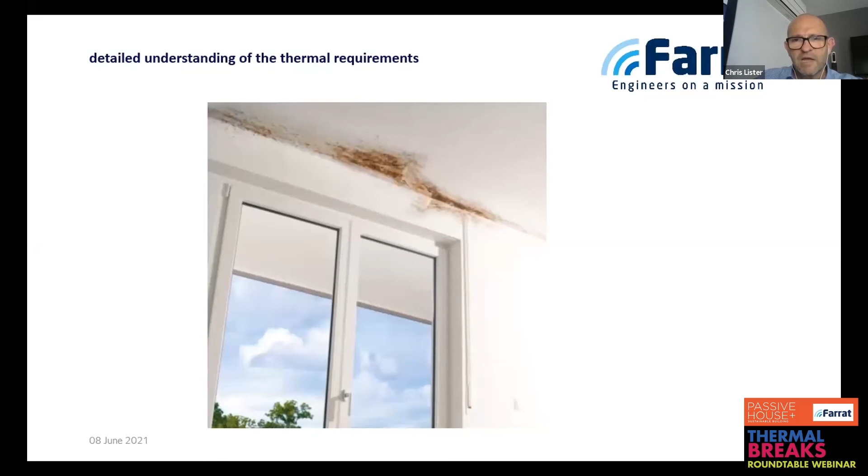And then understanding the ultimate thermal requirements of that building, the comfort factors that have to go into it, the fact that you do not want to see a big black line of mold on your brand new penthouse. These are things that we understand, and therefore we're able to make informed decisions and make them into reality in terms of products.

And this is not just something that has come about since, as we said, potentially 2002. We've been doing this for years. We're a third generation company. We have industrial engineering at our heart, and that comes through in everything that we do, whether that be building acoustics or thermal. So we have got to a stage where we understand optimum solutions.

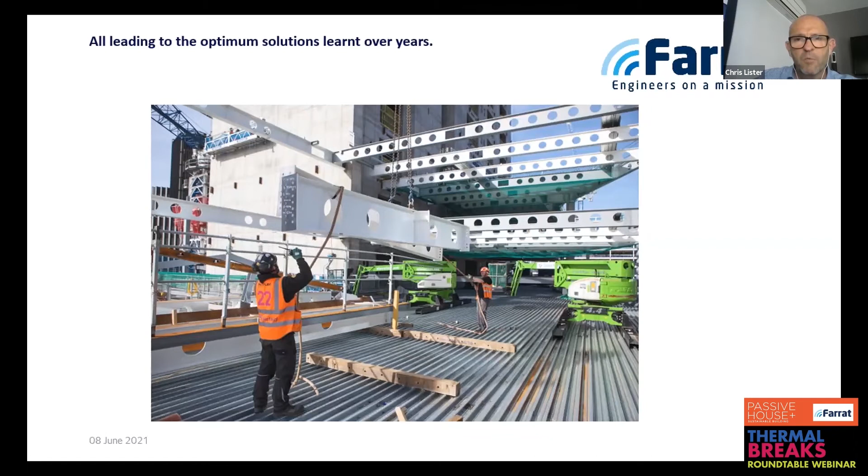We understand that we are a key part of that design process. As I say, if you get us in early, we can give you a good feel for what will and what won't work based on our experience, what has been seen in the real world, and then be able to really give answers that are trusted.

So we have these exemplar performance levels that we know we can achieve, and we have all the backing of all those industry groups to be able to say, look, we know what we're talking about, and we'll tell you if we don't think it works. If you want to do something that you think will work, we'll happily go along with you, and we'll happily help you achieve your goal.

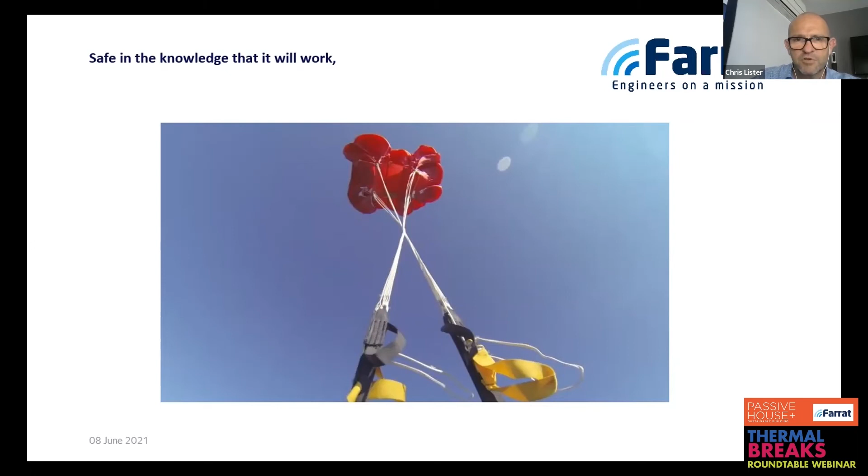But in truth, we'll also tell you when we don't think that's a very good idea, and maybe you should look at a different way of doing it. It comes back to this idea that you are doing something safe in the knowledge it will work. We work in structures. Our products have to last the lifetime of the building. You need to make sure that it goes in once and doesn't have to go in again, and that it will work, because you don't get a second chance on some of these hidden structures. And that's the reality of these structural elements.

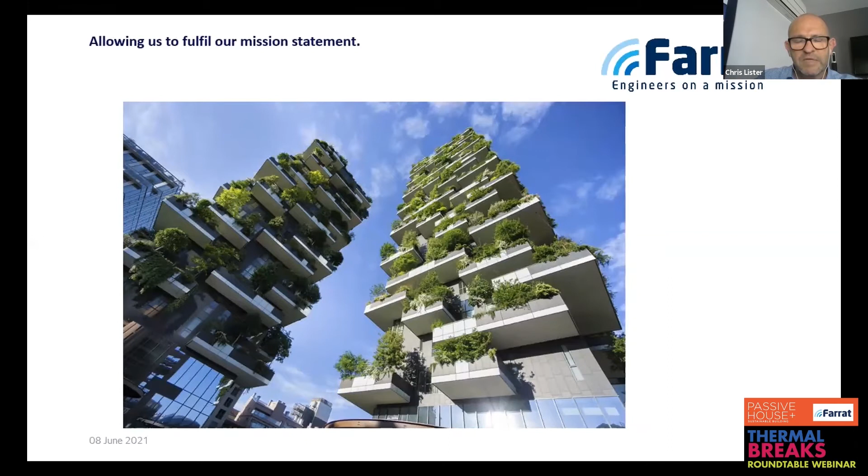So ultimately, we get to build buildings that we'd love to see. We push the building envelope, and from a Farrat point of view, we get to fulfill our mission statement, which is really delighting our customers. And that is really what we're all about at Farrat, making sure that we delight. So thank you very much for that.